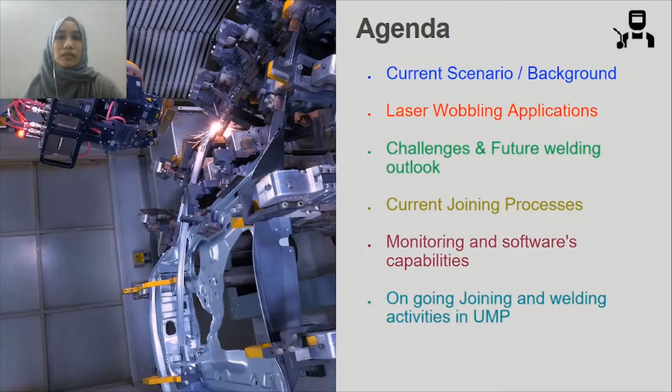First, let's talk about how our rapid industrialization has grown, and this is actually one of the causes towards climate change. Climate change is also known as the global phenomena transformation characterized by changes mainly caused by human beings, such as sea level rise, ice mass loss in Greenland and Antarctica, and extreme changes of weather.

This is not surprising because it is clear that manufacturing operations most likely affect our climate change, and this results in significant greenhouse pollution such as carbon dioxide, with our major contributor being the transport sector.

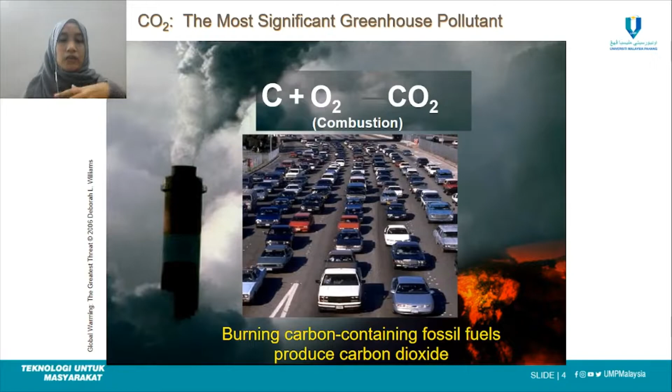We have been introduced to electric vehicles, also known as e-mobility, which is new in our automotive industry. By introducing this type of vehicle, it can help contribute towards a healthy and more stable environment, because cars produce a lot of carbon emissions, and electric vehicles are one good option to reduce that pollution.

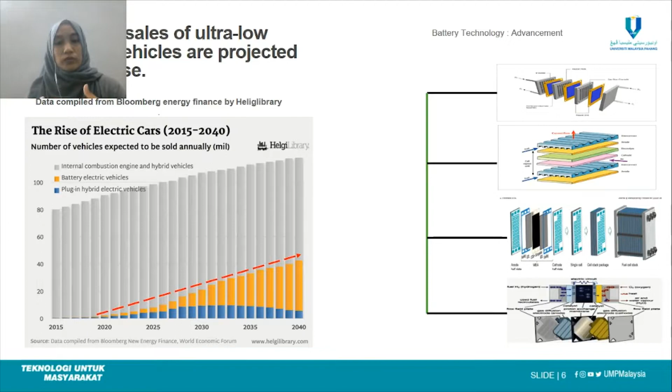The study shows that by 2025, sales of ultra-low carbon vehicles are projected to increase. The data has been compiled from Bloomberg Energy Finance by Heliglibrary. It shows an increasing pattern for electric cars expected to be sold, and as the number of cars manufactured increases, demand for batteries will increase too.

By using laser wobbling welding for e-mobility, it will increase efficiency to produce high-demand products, as laser welding is a very fast technique. Laser beam welding is an excellent choice even for small components and assemblies, such as hairpins for e-mobility in precision engineering or electrical contacting, requiring very precise and automated recognition of welding position with beam oscillation.

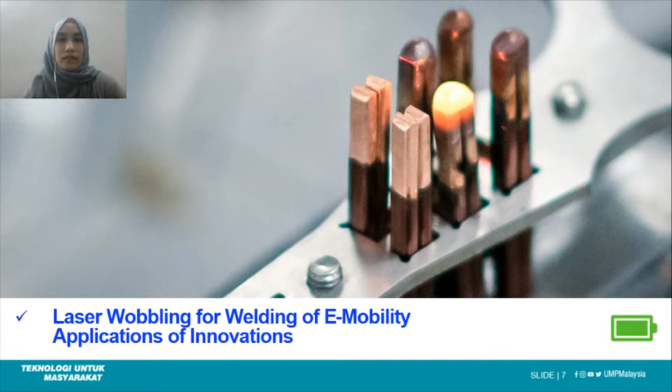Moving on to the introduction of wobbling technology. Basically, laser beam wobbling, also known as LBW, is a novel technique in which the laser beam forms a high frequency circular motion while translating through the welding workpiece. This is a video showing how the wobbling technique operates.

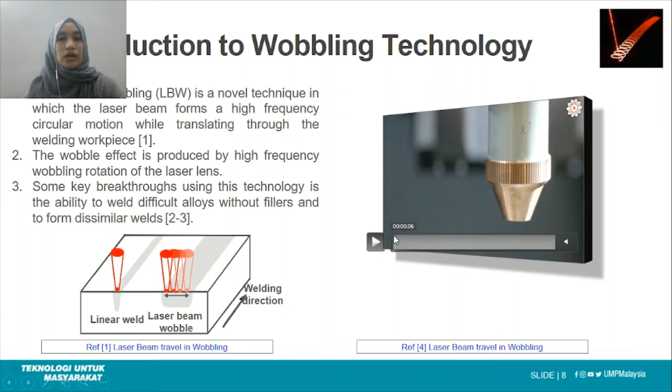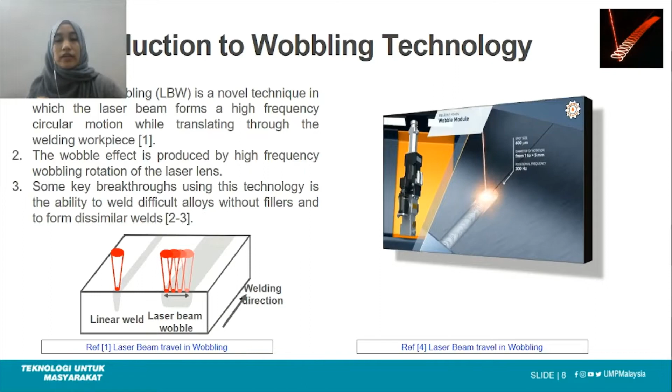Basically, the wobble effect is produced by high-frequency wobbling rotation of the laser lens. Some key breakthroughs using this technology include the ability to weld difficult alloys without fillers and to form dissimilar welds.

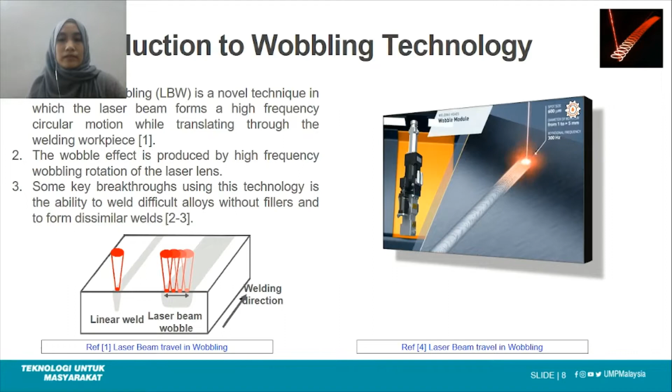An issue that occurs in micro-joining technologies is distortion. Large welding distortion easily occurs in ultra-thin metal structures after the welding process due to low stiffness and uneven temperature field. Some causes of distortion include parent material, amount of restraint, joint design, part fit up, and welding procedure.

The first is parent material properties, which influence distortion, such as coefficient of thermal expansion and specific heat per unit volume. Next is the amount of restraint - if a component is welded without any external restraint, it distorts to relieve the welding stress.

Joint designs, such as both butt and fillet joints, are also prone towards distortion. Next is part fit up - it should also be uniform so it can produce predictable and consistent shrinkage. Excessive joint gap can also increase the degree of distortion by increasing the amount of weld metal needed to fill the joint.

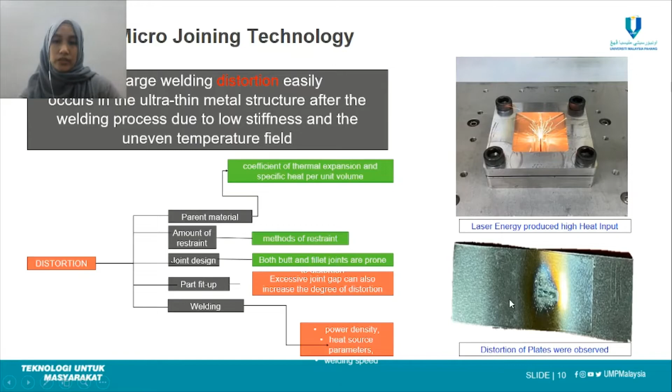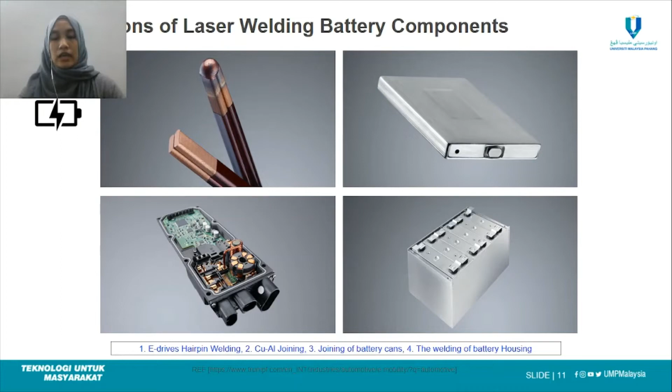Next is the application of laser welding on battery components. The first one is E-drive hairpin welding. Next is copper aluminum joining. The third one is joining of battery cans. And the last picture is the welding of battery housing.

We are going to continue this presentation by showing our results of products made with wobbling technology. A significant number of experiments were carried out to obtain a smoother and defect-free weld seam, and it was found that wobbling distance and wobbling diameter were the most significant parameters affecting quality.

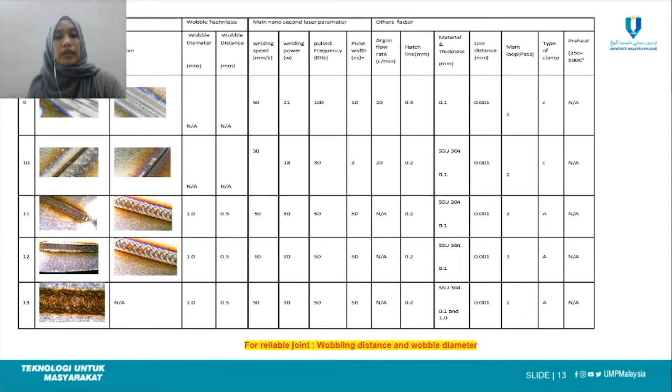So precise control of wobbling parameters is extremely important in welding technology. Here are examples of bipolar plates used in the construction of hydrogen fuel cells. The plates are required to be joined together for proper cooling of microchannels created, requiring intricate joining in dimensions of a few hundred micrometers.